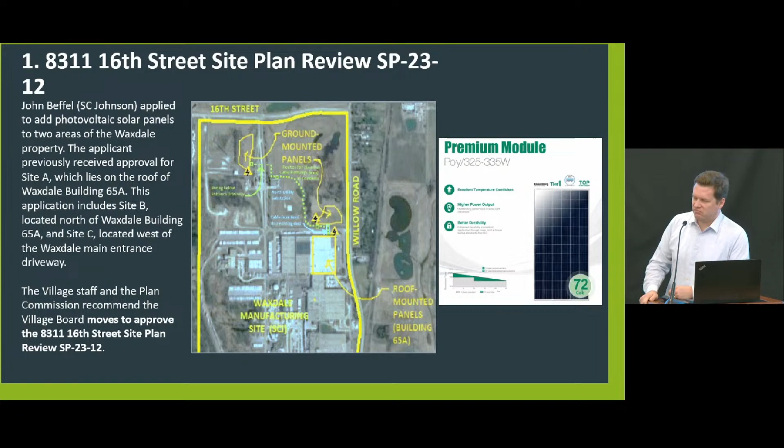I'm very happy to see it. I really like their approach to managing their plant and so forth. And I'm very glad to hear that that is also something that adds to our shared revenue. So is that the case, and I'm off topic, but is that the case as well if individual homeowners are adding solar panels? Do we get some kind of credit in shared revenue in that regard as well?

Generally, yes, but the homeowner ones are so small, I don't know how DOR captures those. It's like pennies. It has to be some level of utility scale, and it has to be measured - the only unit that they measure is megawatts. So that's way beyond what a residential scale can do, unless you have John Menard's house or something like that, you know, a big house.

Well, okay. It's certainly something that we allow by right, and we would certainly encourage other property owners to look at, particularly for our distribution warehousing buildings and stuff that have pretty low power demands. If structurally the buildings can hold it, there's nothing that we're getting in the way of these things going up. Yeah, that's what I mean, just to be able to encourage that. If it's something that's savings for them and additional revenue for us, it's a win-win for everybody.

Thank you. Any other further questions or comments? Any public comment? Then I'd be looking for a motion.

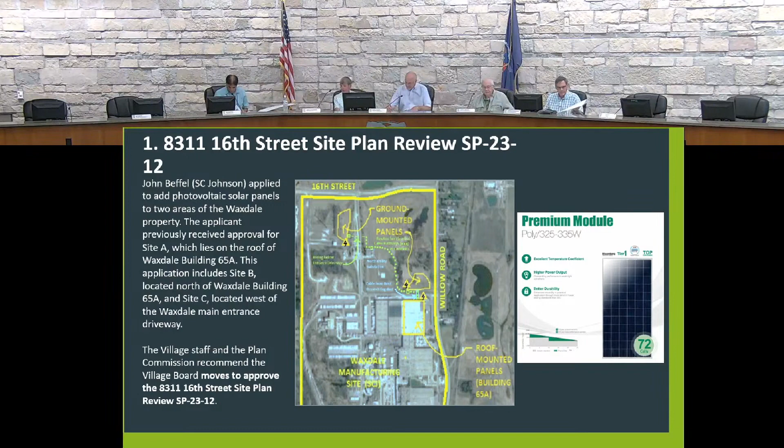I'll move to approve. I'll second that. We have a motion and a second. Any further discussion? Hearing none, I'll call the question. All in favor? Aye. Opposed? Motion carries. Excellent.

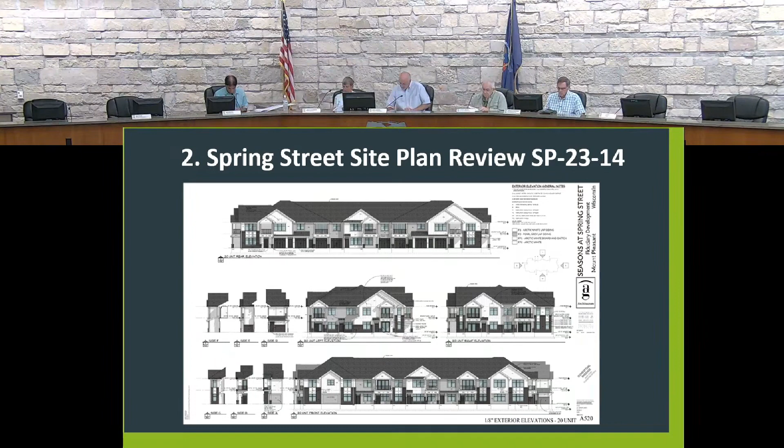Next will be the Spring Street site plan. I'm sorry, we already did that one, right? No, I'm sorry. The Spring Street site plan review, SP 2314. There are multiple slides here.

Fiduciary real estate development applied to build a 320-unit moderate density development with a clubhouse building and 16 two-story stacked flat buildings. The property lies west of County Road V and north of Spring Street. The development would bring Carrington Boulevard and Rosewood Lane northwards to the north edge of the property.

It's a pretty long thing here, so I'm just going to highlight some of the staff recommendations that we have at the end. Issues with the site plan.

First, there is no sewer and water currently installed in Spring Street. The Leo project to the south will bring it. You can see their property line is about halfway across the south property line here. So the adjacent development will bring sewer and water about halfway across their south property line. Fiduciary will be responsible for taking the rest of it westwards to the edge of their property line.

So that will be in Spring Street. That's condition number 1. Sam, is that work in process from the neighbor? Yes, yes, they are in the midst of signing their CSMs and kind of finalizing their application. So your expectation is high that the sewer lines will be brought to this applicant's property line?

Yes. Absolute worst-case scenario, if Leo falls through for whatever reason, the tax increment district is still out there, so we do have a financial mechanism in place. If the cost burden for the developer becomes much higher than they originally anticipated, we can certainly discuss how municipal infrastructure incentives can play into some of that as well.

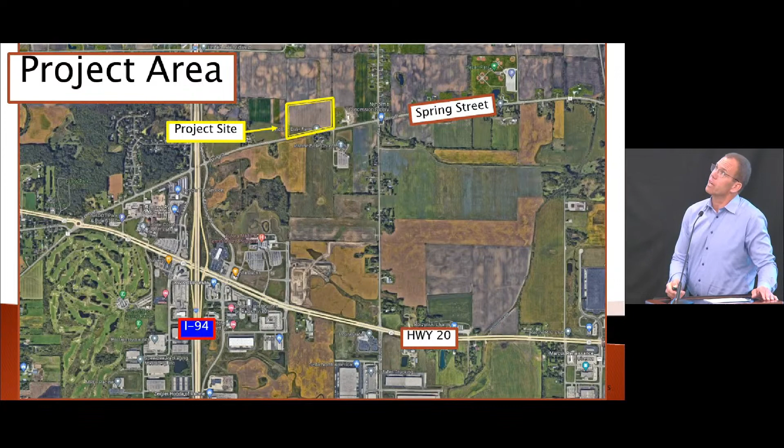About a 12, 13-minute drive, and we absolutely are comfortable with that investment, because we almost view it as a totally different market. Even that drive time, the amount of people on the north side, and people going to Milwaukee, it's a much easier drive. So we're just so pleased with the site. It's a nice flat site, and you don't find a lot of those these days.

That really helps things. Again, we got our approval last September for the RM2 moderate density, and as I mentioned previously, we slowed down due to all the cost increases and TID 7. I know we were the leader in TID 6 and appreciate Mount Pleasant working with us on that substantially. And here, Avenir took the charge and will, as Sam mentioned, make this project work.

We've got our submittal in for a TIF request and look forward to working with you on that. So just to show everyone, our clubhouse is really almost 6,000 square feet, and it's a fantastic representative of the community.

Everything is modern grade: stainless steel, plank flooring, quartz countertops, and individual entrances. So these are almost condo-like units for rentals. Just a view of the fabulous outside setting, grilling, pool, and some of the other amenities in the clubhouse.

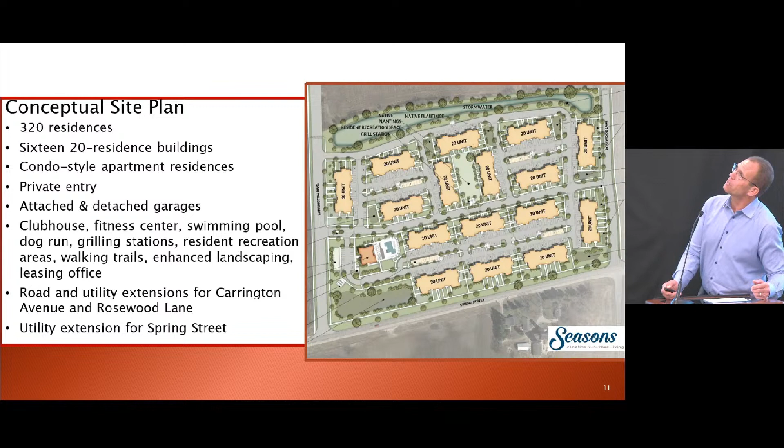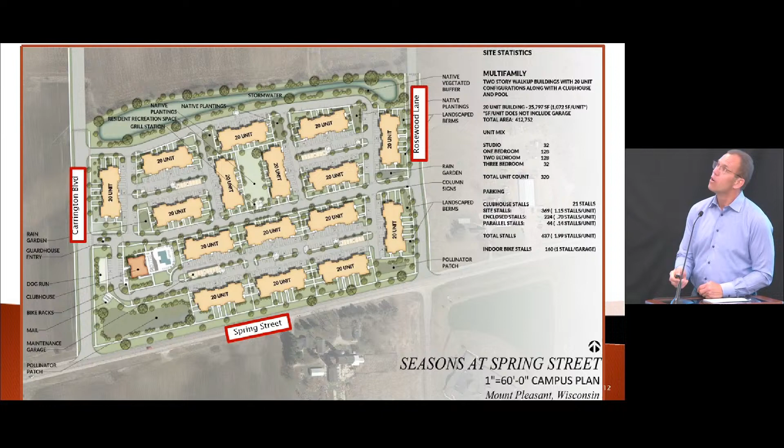So with that, I'll just answer any questions you may have, or I'll take a seat.

I'm just curious, you're the same company that just 10 minutes ago we were considering an extension of, put a project on hold because of costs and factors going up, and 15 minutes later you're asking us to approve a new project, which is fine, but just please educate me. What's your degree of optimism that this project we're now talking about is going to go forward in a diligent, timely fashion versus the one that was just put on hold?

Sure. Well, the original one that was just put on hold was the 9 acres right adjacent to the Seasons at Mount Pleasant. We went through the whole year of planning and ended up with a fully approved site plan last year. Particularly what happened, and I think Commissioner Washburn said it so well, is that starting last March we started ramping up in interest rates. So we experienced from last March to just really 2 months ago generally being halted at 450 basis points in interest rates.

Costs up 30%. So when we went to bid the project last fall, it just became, even with the maximum TIF that would be inside of TID 6 - because we need stronger rents, we have higher costs, but the TID helped us with Seasons at Mount Pleasant - the difference was, as we came into the fall, we hit the worst of the worst, both with the highest costs and the highest interest rates. They've even come down a little bit on the 10-year right now.

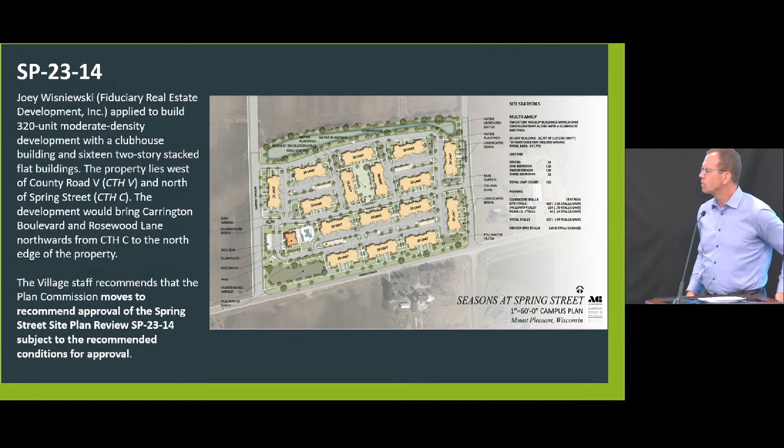Craig hit on it, but I just want to put a button on it. The three-story product has underground parking. Parking structures are extremely expensive, especially compared to stick-built buildings — that's concrete, that's a lot more stuff. So it's a completely different ball game as far as costs go. Just wanted to put a button on that one.

All right, that's a big difference. Yeah, both of them, and the work that all of you have done to set this up to be able to attract the housing, because especially with Ehlers and all the professional advice the village gets — it came to the point last year with our costs, the rents we could charge, the interest rates, and the maximum TIF, and it still didn't even make sense. So that's where it's shifted somewhat and is getting back into line. The increasing rents is helping. The obviously new TID up at the Spring Street area, all those things kind of come together. It was just a bad 9 months, but we were optimistic we'd be in this position.

And kind of following up on that, Craig, if you don't mind, I drive by the Seasons probably 6 times a day, so it's in my neighborhood. And I always see each building goes up, and the next thing I know there's flower pots and chairs on the balconies and cars everywhere. I've noticed the rec center is always used, and I think it was Mother's Day, there were a couple of big parties there. The parking lot was full. The pool looks wonderful — I'm wondering if we get any seasons passes, not having a pool, just kidding. But I guess I'm curious, are your rental rates at the Seasons still pretty good, still up there? I know at one point you were renting in the high 90s.

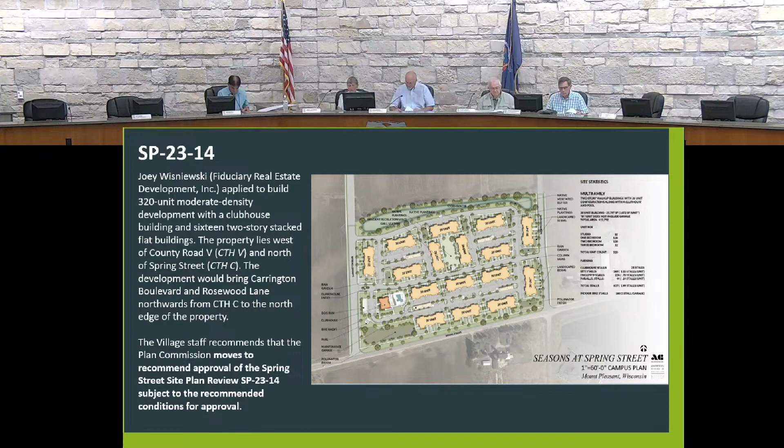Next, we'll go to Ordinance 13-2023, a zoning map amendment for 2217 Racine Street, zoning map amendment ZMA 23-6.

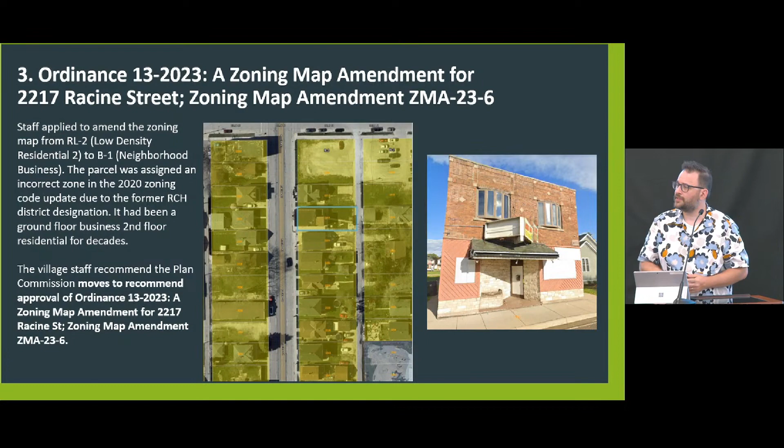Robin, did the applicant that kicked this off have a use that worked within the zoning you're talking about? Yes. I think they were doing personal services, like a beauty salon, something like that. I can't pull it right off the top of my head, but I remember it was applicable within the zoning. Okay, so it used to be a restaurant. I'm pretty sure that's not what they're opening. Any other questions of Robin?

Thank you. All right, next on the agenda, 4930 90th Street, site plan review, SP 2316.

The applicant applied for site plan review for the first phase of the Microsoft data center development. The application is for the master site plan only. They'll have to return for site plan review for each of the individual buildings or areas on the site plan. The village's approval of this application, in coordination with an approved grading plan by the Public Works Department, will allow Microsoft to begin mass grading across the 215-acre southern portion of the property. At this time, they will finish the detailed designs of the individual buildings and be back in front of you.

So all of our comments relate really to the future applications that'll need to come forward, including a fully dimensioned and scaled plan showing parking, driveway, and loading facilities before we issue any building permits, outdoor lighting plans, landscaping and screening, as well as detailed site plan review in general before the village will issue any building permits for any of the individual buildings on site.

But this will allow them to go out and start grading the property, cut in the stormwater ponds, with some level of certainty that the next time they're in front of the Plan Commission, they won't need to move a stormwater pond from one side of the site to the other, kind of thing, which is nice.

In terms of the comp plan, the current comp plan amendment is also going through the process in terms of removing the north-south roadway through the site. That'll be back in front of you after the village board's public hearing next Monday, so that'll be back in front of you next month as well.

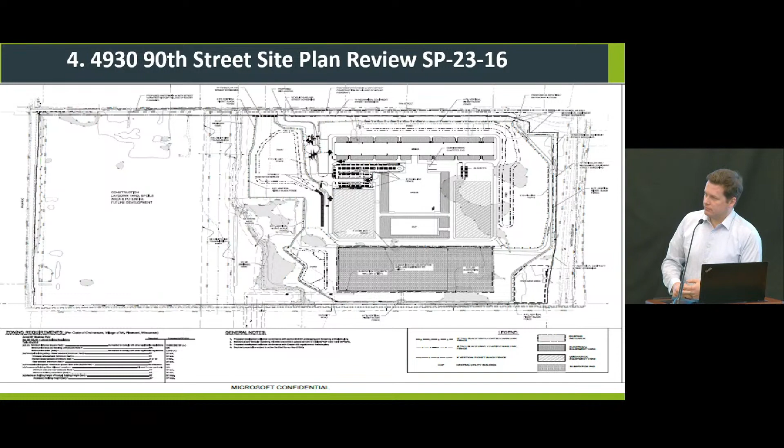Any questions of Sam? Go ahead. Sam, just educating me a little bit on the process and logistics. So this master plan gives... the thought process is that when they come in for building, before they can get a building permit, they have to have a detailed site plan?

Yeah, for the individual areas or buildings that they'll be constructing at that time. But because the site is so large and they're not going through a standard subdivision procedure cutting it into multiple lots, there's not a very good route for them to go. We don't have very many 215-acre parcels in the village that aren't further subdivided.

So the way we opted to move forward was to have them make a site plan application to you all, just so they could have that level of comfort. My biggest worry was that they would get a grading permit and start grading, which they don't technically need your approval for, but if there were any site plan changes the Plan Commission requested at that time, I'd hate to see them have to cut in a stormwater pond in a completely different portion of the site. This allows them to have some comfort that we know where the buildings are going to be generally, where the parking is going to be, all that kind of stuff.

There might be tweaks to this. I'd expect there would be tweaks as they move through final detailed design, and you'll see the actual landscaping and building plans when those come through. But this just allows them to keep rolling out on the site while they finish up some of their designs. Yeah, I think in my time on the commission, this is the first time I've seen this master site plan review step.

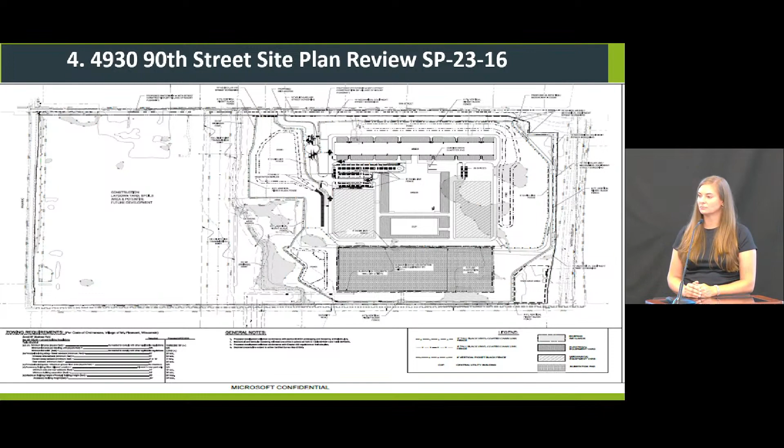We really want to thank you for that effort, because one thing that's become apparent over the last couple of years is all this conversation about transparency. For this kind of event to be heavily broadcast and heavily open to the public, as well as anyone in municipal government, really says a lot about your company's internal philosophy. It's exciting to know we have that kind of company coming in with that feeling, bringing all these people into our little town. I know the bike race was really big, but bringing 20 of you in is great.

So anyway, thank you so much, it means a lot to us too. We're really excited to be here, and it's been an incredibly warm welcome for us from day one in Mount Pleasant and the greater community. We're happy to do it and looking forward to tomorrow.

I'd just offer a suggestion that you'll likely be asked questions about permanent full-time hiring at the facility, how many people you expect, and the wages. I think that will be a point of emphasis in the public's questions, so hopefully whoever on your team is prepared to answer those.

Excellent, anything more from Morgan? Anything else? Paul wanted to say something - you've probably seen Paul, he's done some of our media. This is Paul Inglis, also from One Microsoft Way in Redmond, Washington.

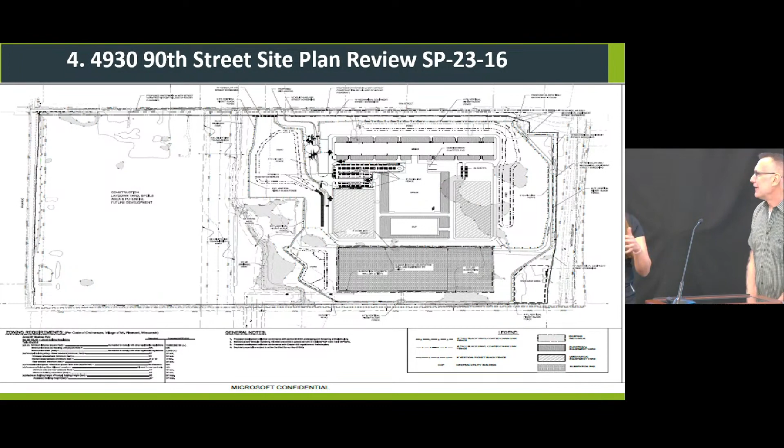It'll be 3D renderings with different perspectives, including a bird's eye view of the layout of the buildings. Very conceptual, based on what you see here, but it really helps people visualize and bring to life what it's going to look like. Think of them as a conversation starter, including for yourselves, so you can come in with thoughts and questions and ideas of your own, then apply them as you see the actual building plans and more developed site plans.

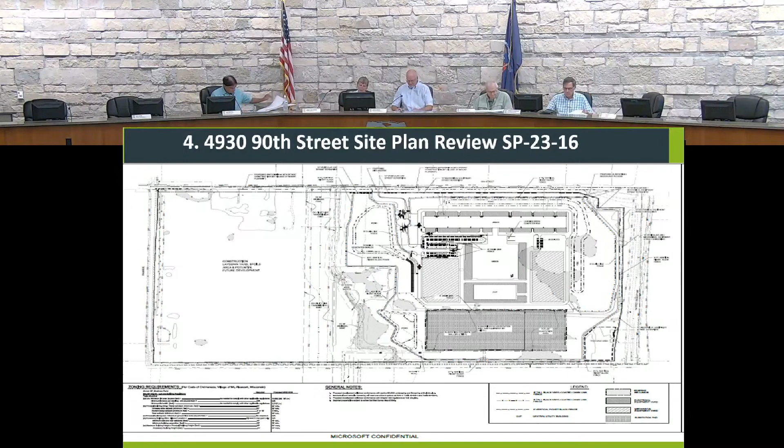All right, moving on. Next on the agenda, 4530 Old Green Bay Road, Certified Survey Map, CSM 23-7. Oh, I'm just going to be here for emotional support.

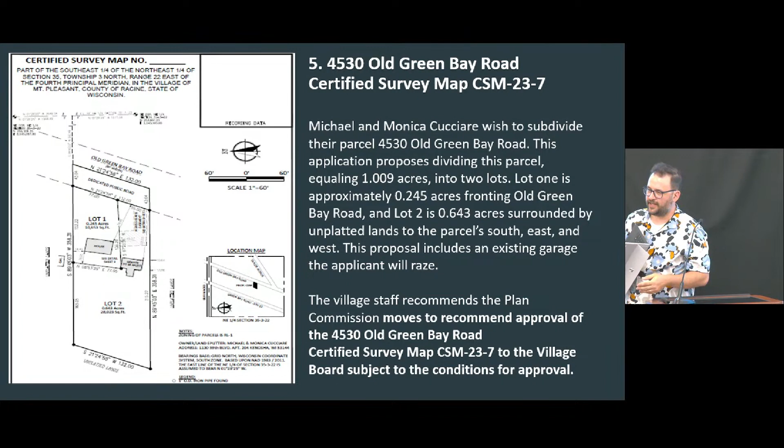I'm going to take this time to introduce our intern, Emily Wagner. She's here for the summer, and she is going to be presenting this report on the CSM. She's just completed her first year at UWM Planning School, and we're really excited to have her. Go ahead. Thank you so much for this opportunity, I would love to address this CSM with you all. Let me know if I'm a little quiet. I'm just getting used to this.

So right now we are looking at 4530 Old Green Bay Road, CSM 23-7. Essentially, Michael and Monica Cucciare wish to subdivide their parcel at this address. The application proposes dividing this parcel, equaling just over 1 acre, into 2 lots. Lot 1 is approximately 1/4 acre and fronts Old Green Bay Road. Lot 2 is about 0.64 acres, surrounded by unplatted lands to the parcels south, east, and west. This proposal includes an existing garage that the applicant plans to raze.

So overall, the village staff recommend that the Plan Commission move forward with recommending the approval of 4530 Old Green Bay Road, CSM 23-7, to the village board, subject to the conditions for approval. So I'm just going to run through those conditions really quickly.

So if you look at the image displayed on your screens, we can see that this is a flag-shaped lot. This is a consideration staff had to keep in mind in terms of creating equal lots. Our overall goal is to create right angles within lots, so when we get an odd-shaped lot like this, we have to make additional considerations. We ultimately determined that this lot will not cause undue hardship, so we are allowing it.

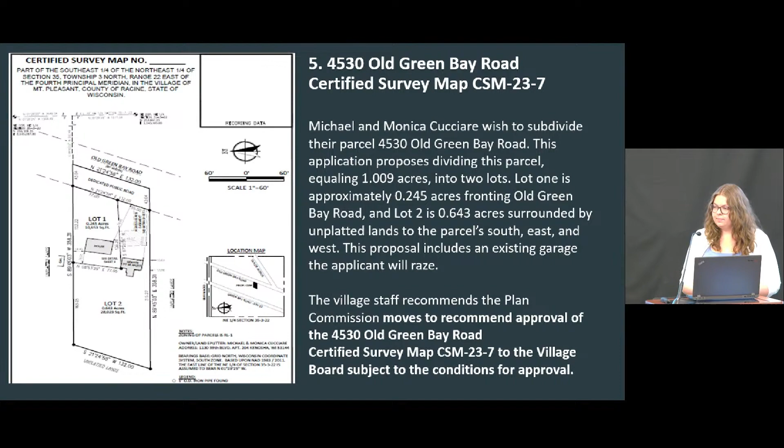Thank you, very comprehensive. Any questions? Nice job. Mr. Chairman, I was going to add, if that's your presentation as an intern, I can't wait to see what you will do when you graduate and become full-time. Excellent job.

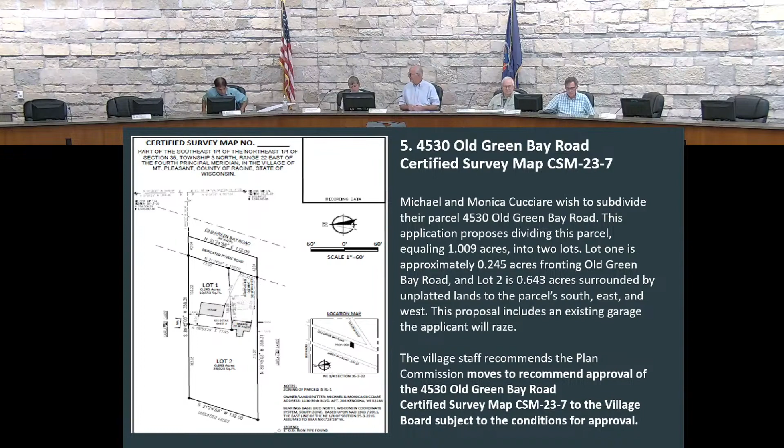I would like to make a motion to approve 4530 Old Green Bay Road Certified Survey Map, CSM 23-7. Second. Motion and a second. Any further questions, comments, concerns? Hearing none, I'll call the question. All in favor? Aye. Opposed? Motion carries. Good luck to you.

Thank you. You can talk to Sam about some of the follow-up and the timelines, because this will go to the board Monday night. Just for the record, our recommended approval is subject to the conditions for approval. Yes sir, excuse me, I apologize, subject to conditions. Second is good on that.

Do we want to take a quick 2-minute break? Sure, let's do that just for now. Yeah, this next applicant deserves a lot of scrutiny, I think. Yes.

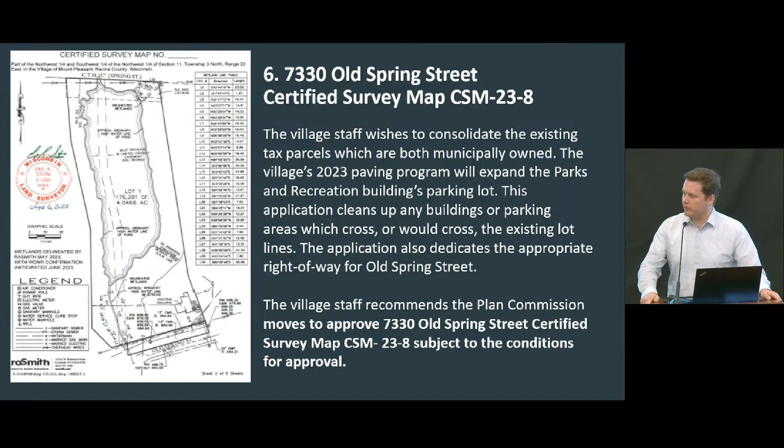Just a brief update: the parking lot reconstruction will happen later this summer, so we'll communicate with the public through the normal paving program schedule that Lisa and her team have been putting out. It'll be a nice facility when it's all done, with a revised and slightly expanded parking lot for people to visit our Parks and Rec office, which has been quickly and happily successful in terms of renting out to people and things like that. So it'll just be a nice beef up to the amenity. We won't stop there; we'll make long-term improvements to the building, but this is the first thing George and his team wanted to do for the property to upgrade it. I've seen the plans and it looks great, so I'm looking forward to seeing the whole project done. Good, all right.

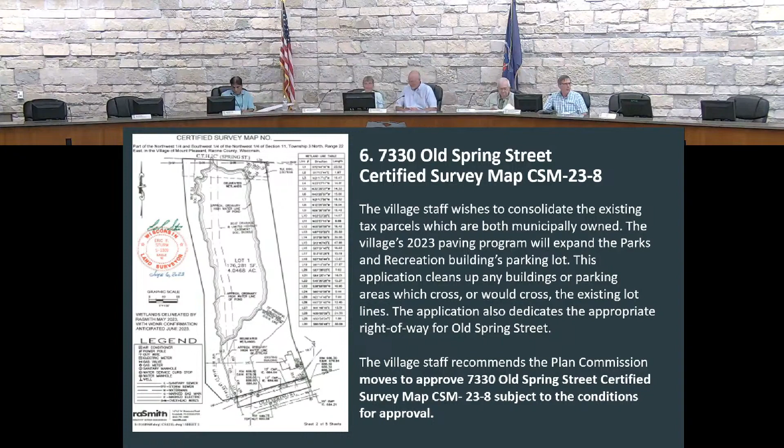Do you vote? We didn't vote. Oh, we need a second and a vote. I was the second, we got a second. This was further discussion. All in favor? Aye. Opposed? Motion carries.

That's a huge addition though. Yes, that's going to be terrific, because it is well-used, and I think that's just wonderful as well. That's an important part. The crossing will have extra parking at the trailhead, as George said, and then the crosswalk will be upgraded nicely so people can feel comfortable. We're taking away some of the overflow parking across the street where people were parking on the grass, so people should feel comfortable crossing Old Spring, and hopefully this will help.

All right, next we'll move to the Pike River Crossing Final Plat, FSP 23-2. This is a plat you've seen before for a mixed-use neighborhood with 82 moderate-density lots. The village board approved the plat back in 2022, and the applicant has been going through probably 25 conditions on that plat they were trying to get done before they closed on the property.

So we approved it with a fair number of conditions. They've been checking those off the list, but one of the areas where they've had more coordination than they wanted is with our friendly Department of Transportation at the state level. So why this plat is back in front of you is the Pike River Way connection, shown at the very bottom of your screen. That is a connection to 31 there on the plat.

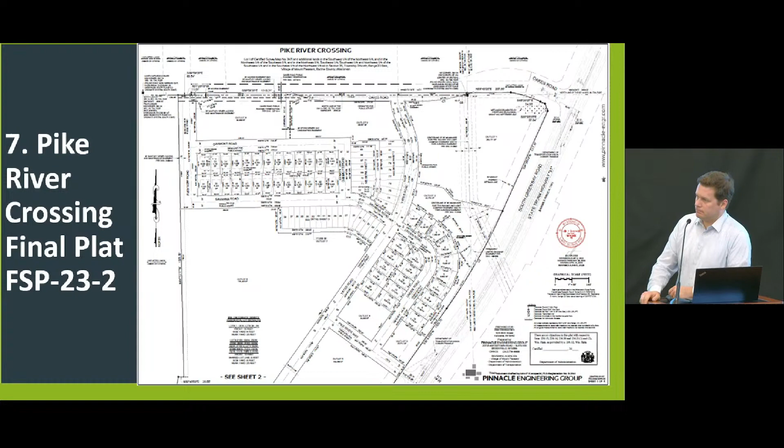Sam, just procedurally here, we approved a final plat of subdivision for this project, correct? And now, are you bringing back an amended final plat, or are you bringing back a fresh standalone final plat? And if so, how does that work legally or logistically?

There's no functional difference because they never recorded it. If they had recorded the property, then it would have been like an amendment, and that would have been tough. But thankfully the process worked as intended, so they were going to record it, DOT objected to the plat, the Department of Administration noted that, and the applicant got back and addressed DOT's objection. This is how they worked through it with DOT to solve that objection, and then they'll just record this as the final plat.

So there is no amendment or anything else needed, it is just the final version of the plat. So as far as the village's regulations and policies and procedures, what we're looking at today will be the final plat, correct? Yeah. And generally for small things, or things contained within conditions, we won't bring them back to you because we've discussed them or you've contemplated them. But because they are dedicating all of that new right-of-way, by reading the state statutes it was pretty clear they should come back and get your reapproval again.

It's not our favorite process ultimately, because that right-of-way south of this first phase isn't engineered. So we'll likely have to amend that Yates Drive right-of-way in the future to abandon some parts of it as it's engineered, even if it's just a foot or so difference. So from our point of view, this whole process has been kind of annoying, but I get where DOT is coming from, so this is just one of the ways we have to solve it. In your conditions, it talks about the subdivider shall amend the plat to show vision triangle restrictions.

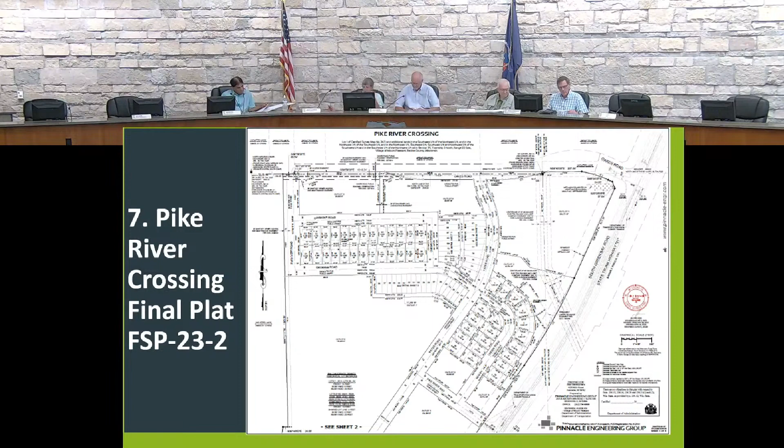Do we have a motion? I'll make a motion, Mr. Chairman, to approve Pike River Crossing Final Plat FSP 23-2. Second. Motion and second. Any further questions? That is subject to the recommended conditions. Subject to the recommended conditions, correct. Yes. Good catch. All right, all in favor? Aye. Opposed? Motion carries.

So that appears to be my bad—I need to make sure I add those conditions to motions at Plan Commission. Frank will catch it, don't worry about it. Okay, thank you, Frank, he's got your back. All right, thank you, Frank.

All right, next will be park bench donations. Just a second, pulling up the applications now—they got closed out. I believe we have 4 benches and 1 tree donation here.

So the first one: the individual had submitted 2 different applications for Campus Park. She did not indicate that on the actual form itself, but she already had a Campus Park one approved before. We already have designated bench locations for this, so we're going to go out there, tour, and figure out which ones she wants, based on the plan that's out there. So those are the first 2.

The third one is on the Pike River Pathway—there's already a built-out concrete slab just south of Brown Road, so that will go there. The McFarland one is going to be a little further south of that previous bench, located by the marker for RCPRP.

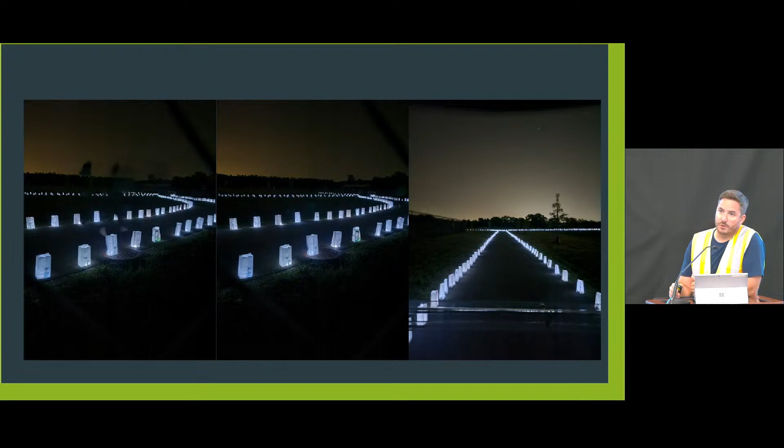So they shared some photos from the event that are up on the screen now. They actually liked the construction fence because they were able to hang a lot of their signs for their sponsors, so that alleyway was filled with sponsor banners. They had a great turnout, and it was a good test for us from the facility standpoint.

We ran into some issues that we've since rectified about how the time clock works with the doors and the key fobs, so it was a good test for us before we actually get open for everybody. And I'm sure that's on everyone's mind - when are we opening? I've been working with Sam and Lisa on the information we're going to get out to the public.

The fence is currently scheduled to come down starting July 6th, which is about a 5 business day procedure. So it'll be the week of July 10th when we'll start opening up various amenities. The restrooms will be open, the basketball courts, the walking paths.

The splash pad will be open July 17th, and that will go through Labor Day. The picnic shelters will be available for use. We're only going to be reserving one shelter, which is the one located by the pond. Those bookings won't be allowed until August, but we'll begin taking reservations the week of July 17th.